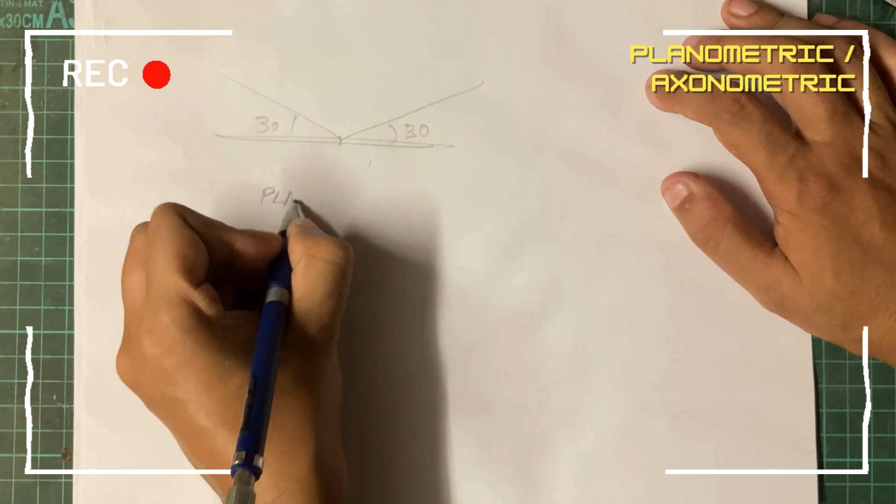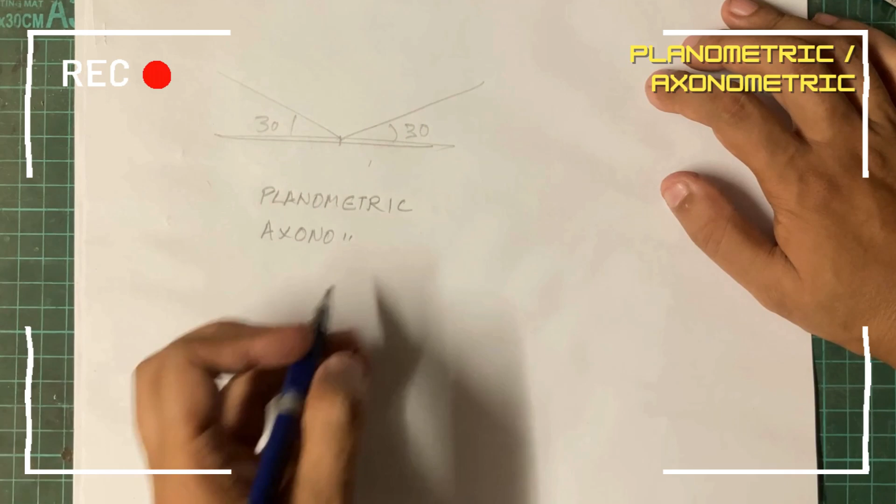All right, now with isometric, which we discussed as 30 degrees, 30 degrees. So this is 30 and that is also 30. This is your isometric. Now with this, you also have two more views. One is called planometric, and you have another one which is called axonometric.

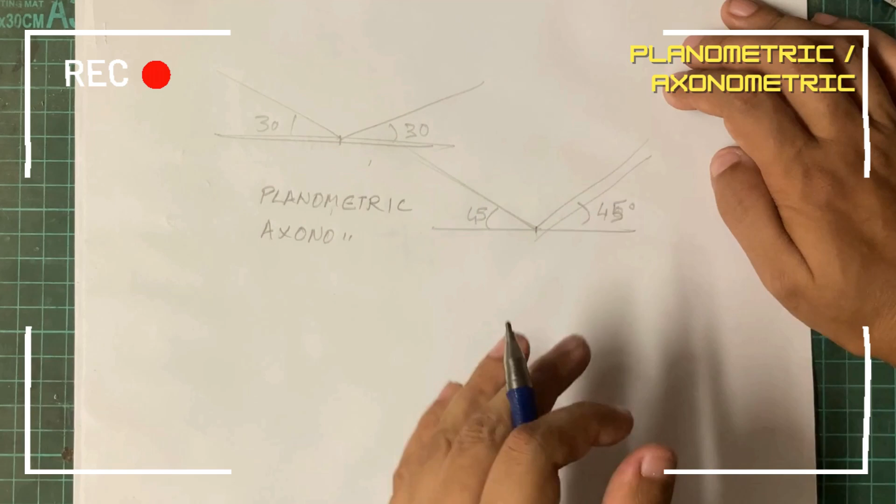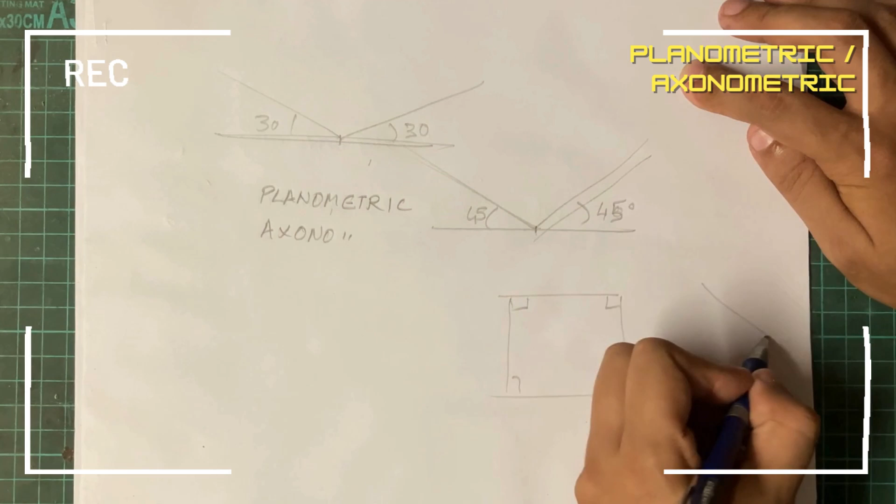Okay, now in planometric, what happens is if this is your base and that's your starting point, you will go 45, 45. So 45 degrees here, 45 degrees here. And if you can see this, which obviously you can, if I look at a square and I say this is 90 degrees on each side, and then I just turn the orientation of this and make it look like a diamond, but still a perfect square, these remain 90 degrees each. And I take this as the baseline.

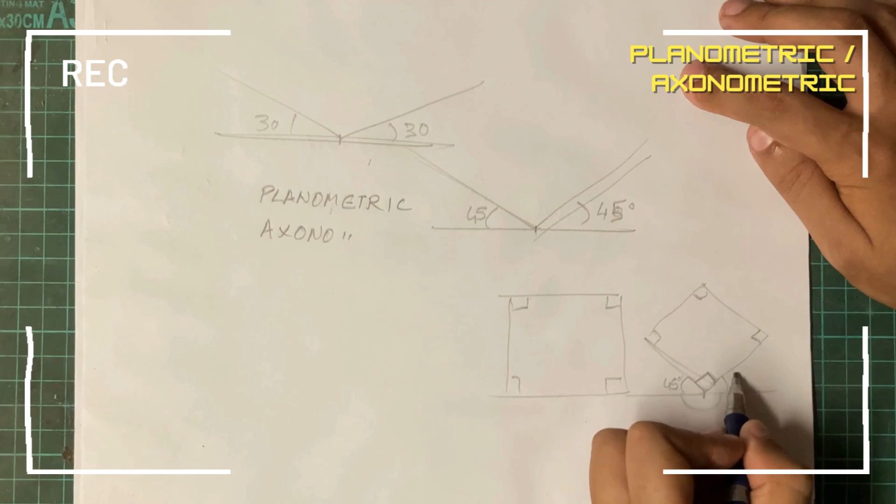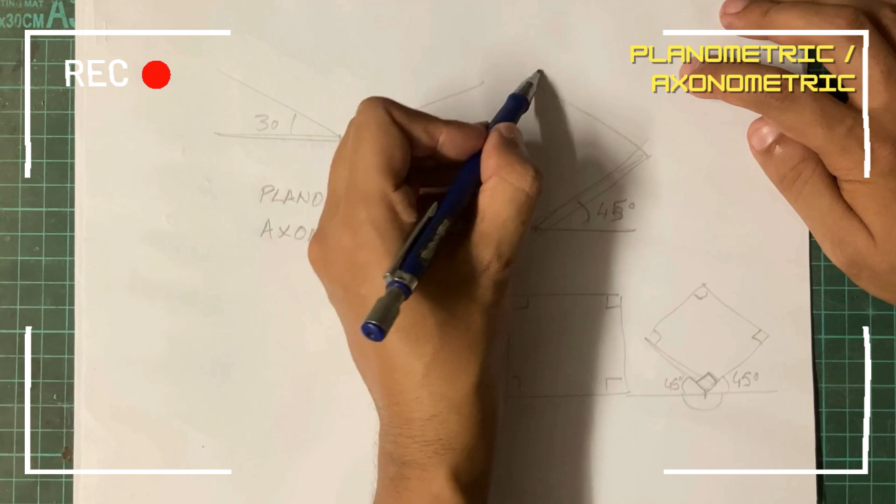If this point is supposed to be 180 degrees, which means on the top also it's 180 degrees, and I know the center is 90, then I'm left with 45, 45 on either side. So that is something you'll have to keep in mind, because if they ever say planometric and they say 45 degrees this way and 45 degrees this way, actually you are constructing a square. And if they ever ask you to construct a circle within the square, that's easy. You take the side bisectors, find the center, take that as the radius and construct the circle.

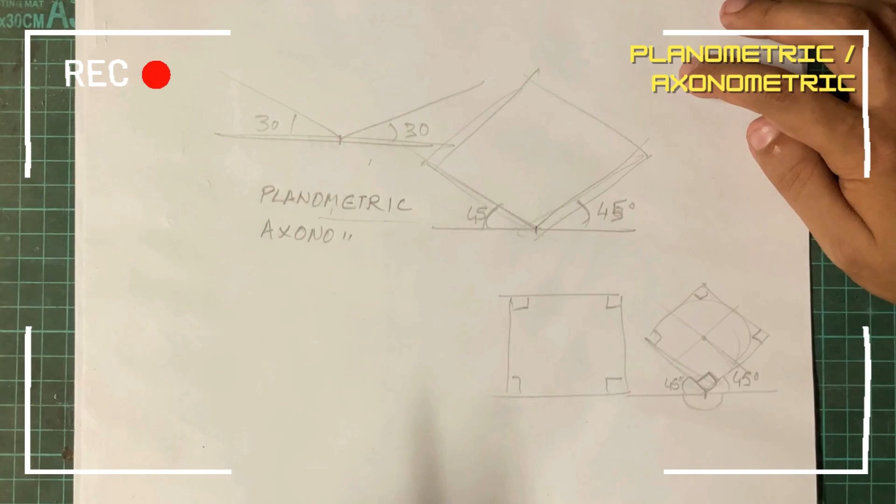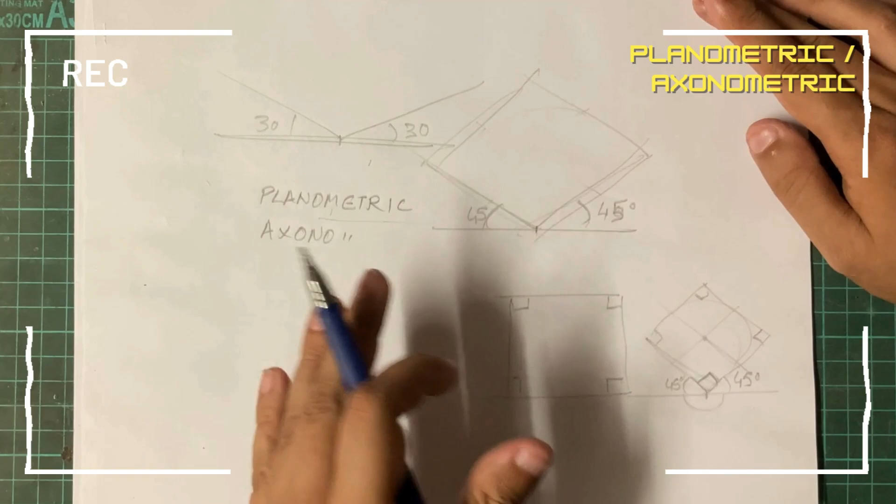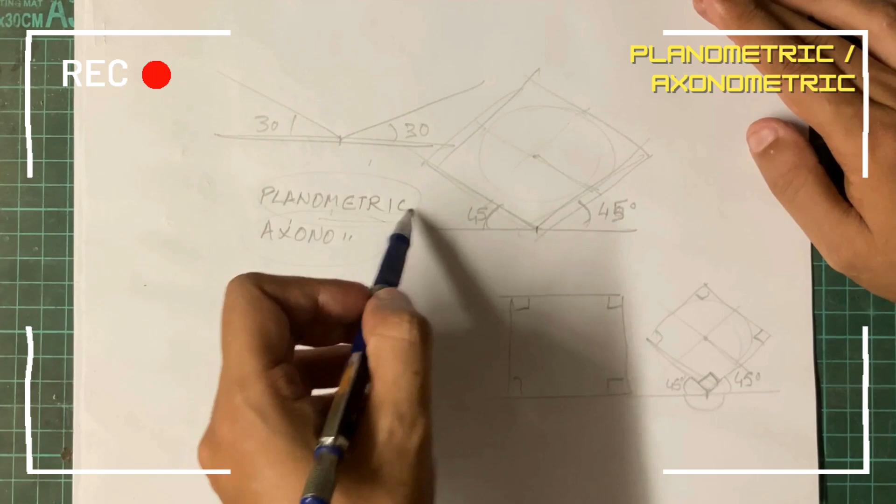So it's got nothing new about it. The only thing they have changed is the orientation of the square, and therefore it looks off. But unlike the isometric square where you have to find the side bisectors and figure out the radius to figure the circle, you don't have to do all that. You just find that center, take the radius and turn it around and you'll get a circle. So depending upon the shape they have given and which style of drawing or projection they have asked for, you will create the polygons.

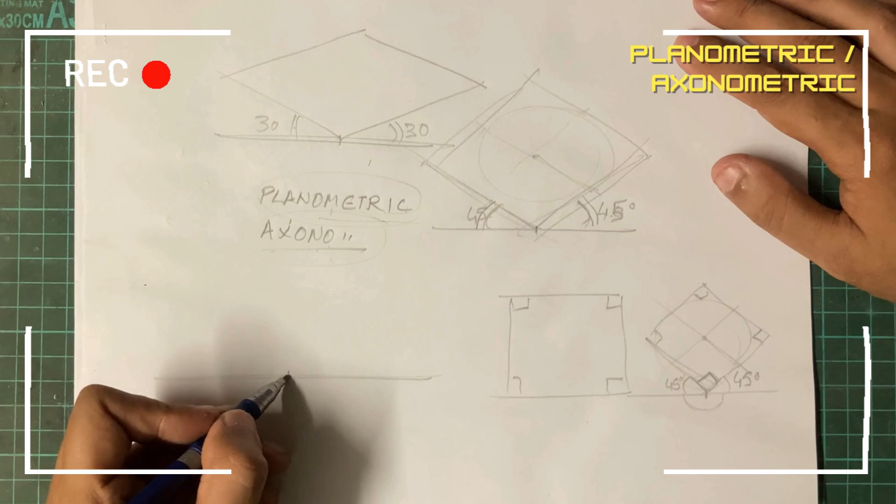In isometric, the shape is still kind of mellowed down because it's not a huge angle of elevation. In planometric, the angle of elevation is pretty high. And sometimes they also mention something called axonometric, where if this is the base, one side is going to be 30 degrees, but the other side is going to be 60 degrees. So any shape that you need to construct will need to be constructed in this. Usually axonometric is given without curves.

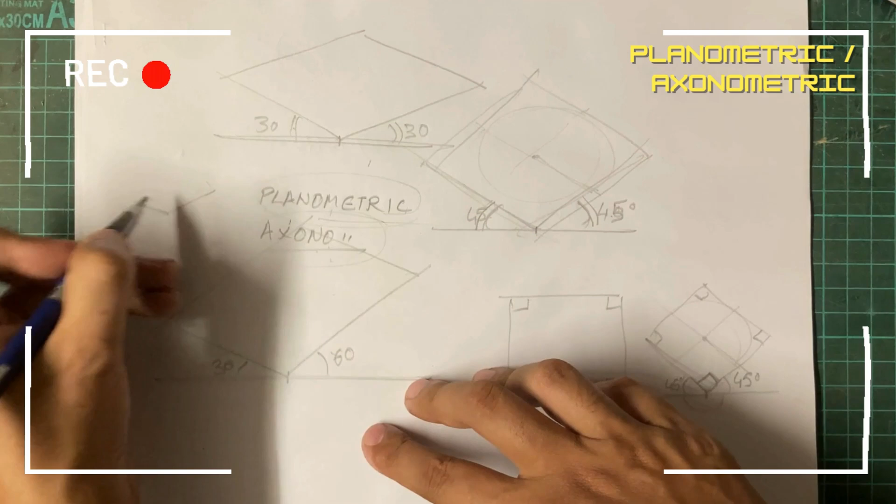So simple shapes. So let's say you need to construct a house, they may choose to give you axonometric to create this. They may choose to give you the same thing in planometric, but in planometric they may also say, okay, we need a semicircle somewhere, and it's not difficult to work with. In isometric, however, they can play around.

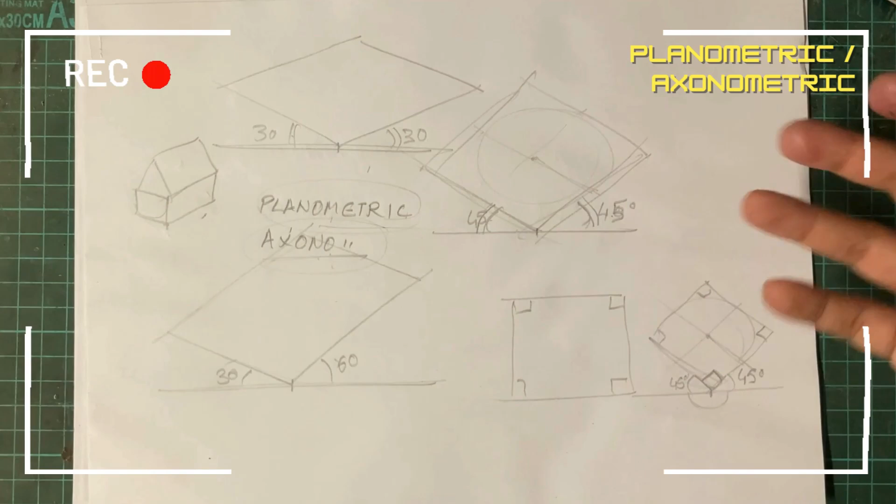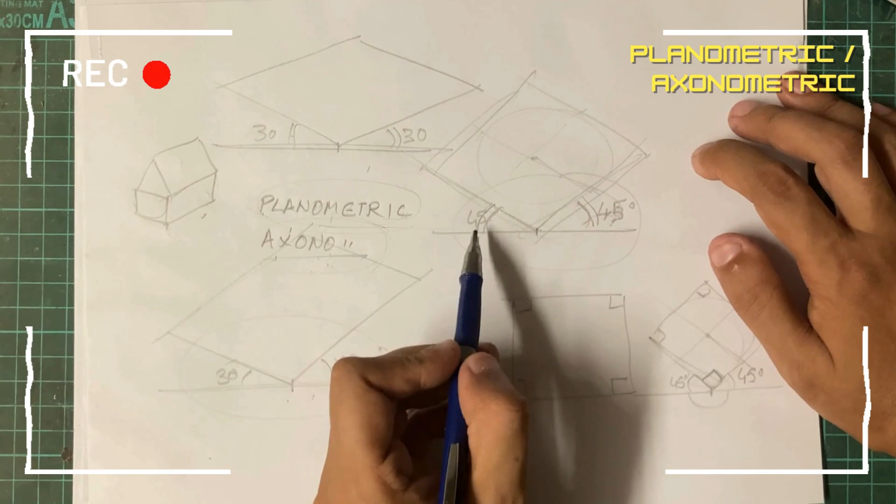Also, one thing you have to keep in mind: sometimes with axonometric and planometric, if they haven't given you a shape to start off with, it is okay if you give them 45, 45, because there are a lot of places, and even if you Google, you'll realize that planometric may be called this or this. And the same way for axonometric also. So usually students are given that freedom to draw it either at 45, 45 or at 30, 60.

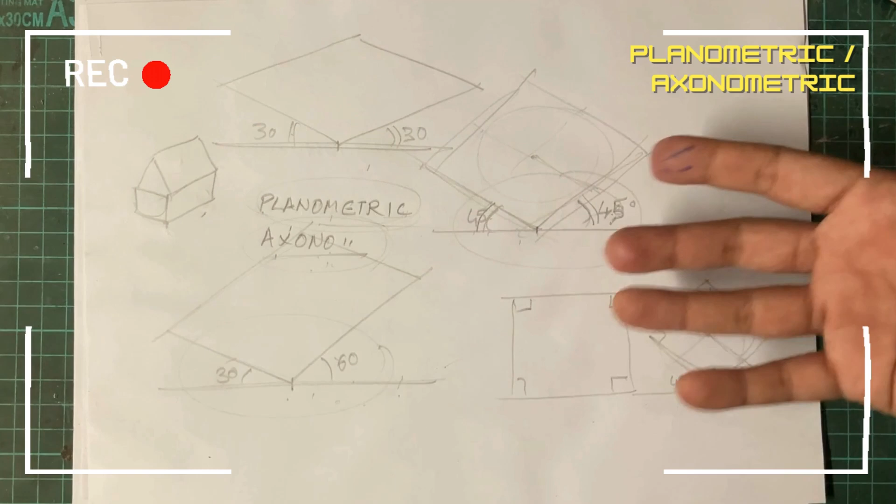But sometimes they may also choose to indicate with an incomplete drawing what it is they are looking for. So just keep the protractor handy and see which one they have given. If they've given something to go by as a reference, then obviously you go ahead with that style. But if they have given neither, then you can work with whichever one you are comfortable with.